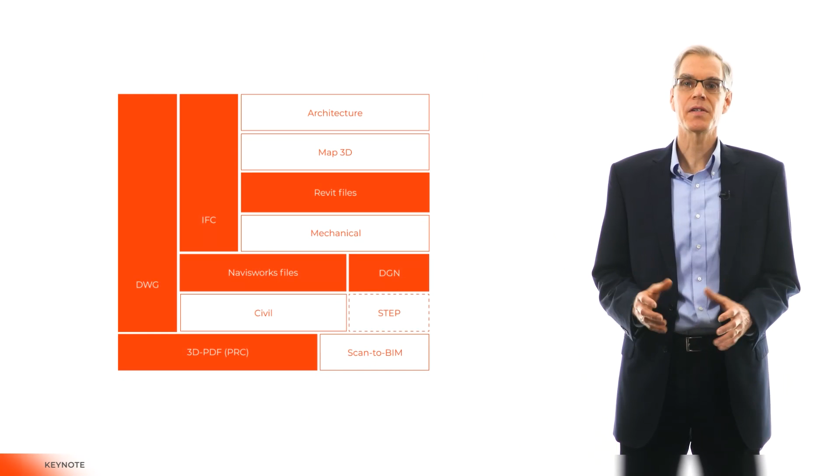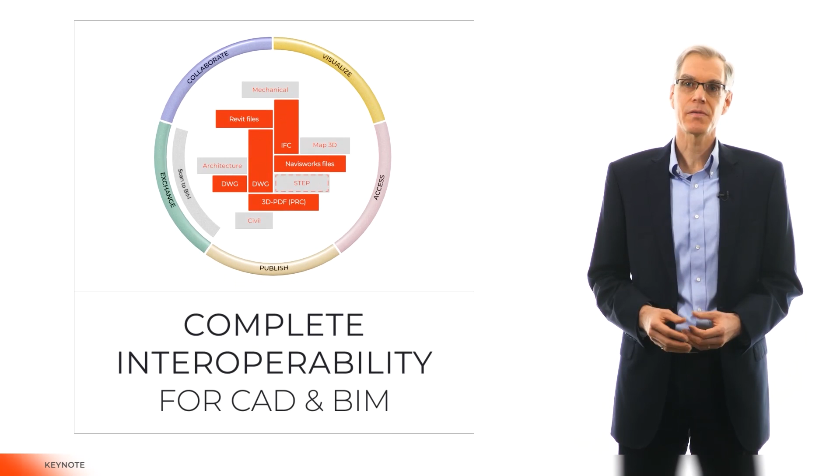During the past 5 years, the ODA platform has been quietly undergoing a transformation. We've taken a set of individual format SDKs and evolved them into a unified platform that can solve an increasingly sophisticated set of interoperability problems. Our offering to the industry in 2021 is complete interoperability for CAD and BIM, and that's the theme for our conference this year. Our agenda today includes technical presentations from the ODA development team, real-world success stories from ODA members, special guests from Google and Building Smart International, and new this year will be a couple of panel discussions from industry experts that I think you'll find quite interesting.

At the start of the pandemic last year, we made a smooth transition to work from home, and most of us are still in that mode. I hope that we'll be able to safely reopen our offices by the end of this year, but in the meantime, we've maintained an aggressive development schedule, and our team has performed well during a difficult year. Membership growth in 2020 was flat, which was not unexpected, but we finished the year strong, and 2021 through third quarter has been our strongest year on record for membership growth. The pandemic isn't over yet, but we're hiring aggressively, taking on new projects, and we see a bright future ahead for ODA.

Narrowing in on BIM, industry experts expect the BIM software market to grow by 13% annually through 2024. Global infrastructure spending over the next 20 years is expected to be more than $90 trillion. Commodity prices are expected to rise more than 10% this year, and labor costs are increasing. At the same time, labor productivity growth in construction has been increasing at a rate of only 1% per year over the past 20 years, compared to 3.6% for manufacturing. There's a huge opportunity for companies that can improve the efficiency of the construction industry through digitization.

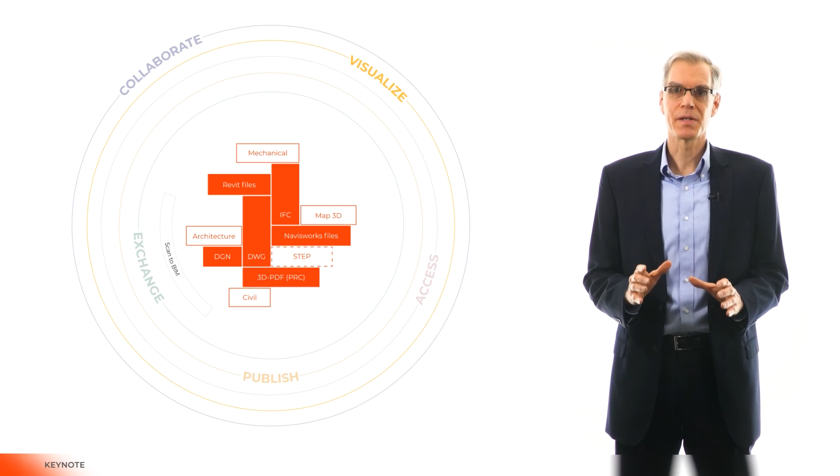Complete interoperability is a set of integrated technologies for working with CAD and BIM data. It's format SDKs on steroids. It includes common frameworks for visualization, publishing, and web collaboration, and we have our own solid modeler and facet modeler for working with complex 3D geometry. It's everything you need to build sophisticated CAD and BIM applications on any platform, including web.

A fundamental part of ODA's mission is a commitment to Open BIM. ODA is a strategic partner of Building Smart International, and our goals as an organization are fully aligned with BSI. We participate in a number of BSI working groups to help advance the creation of Open BIM standards. Our Open BIM technologies include a comprehensive IFC toolkit, as well as support for BIM data exchange through the mvdXML and IDS standards. On the collaboration side, we now support the OpenCDE standard in our cloud platform. OpenCDE is BSI's new standard for common data environments, which includes workflows for issue resolution and document exchange.

Finally, we have OpenIFC Viewer, our free viewer that integrates fast, professional-grade visualization with support for the latest IFC versions, along with clash detection, BCF issue resolution, and more. ODA offers the best and the most complete Open BIM solution on the market today, and we're committed to Open BIM for the long term.

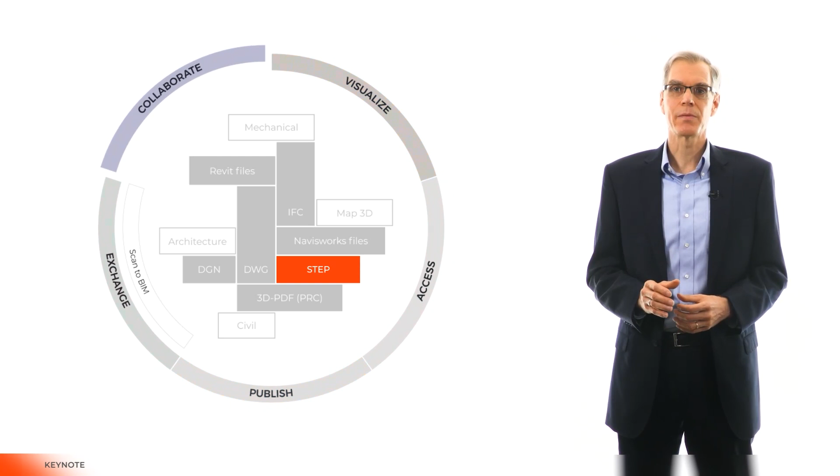ODA has been making great strides with BIM, but we're also seeing strong demand for advancements in mechanical CAD. In a recent member survey, more than 50% of our members requested a solution for STEP, the standard exchange format for 3D mechanical CAD. In response to this demand, we recently began work on a new SDK for STEP. Our goal is to deliver a best-in-class solution with full data access and creation support, integrated visualization and publishing. Complex 3D geometry will be supported by our own native solid modeler, so there won't be any dependencies on expensive third-party modelers. And since STEP is an open standard, our STEP SDK will be available to all ODA members at no additional cost.

ODA is in the process of joining PDES Inc., the organization that maintains and develops the STEP standard on behalf of the industry. STEP has been around since 1994. It's been a successful standard and one that's still growing and adapting to the changing needs of the industry.

STEP is now part of ODA's strategic mission, and we're looking forward to delivering our new STEP SDK by the end of 2022. Laser scanning technology has been advancing rapidly in recent years. Even the latest iPhone has LiDAR capabilities. But you can't say the same thing about our ability to process the point cloud data generated by all of these really cool laser scanners.

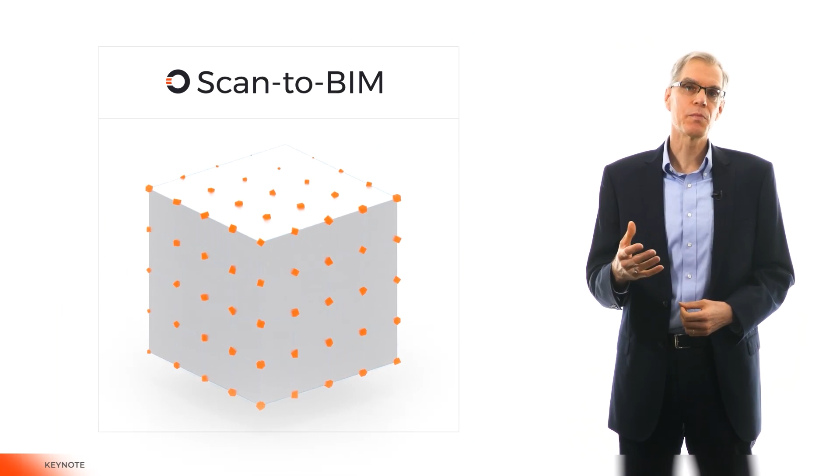It's not enough to import a point cloud and use it for reference in a design tool. We need to be able to generate BIM models automatically from point cloud data. To address this problem, ODA has created a new strategic interoperability group for Scan-to-BIM. We're working collectively with a group of ODA members to develop technology for converting point clouds to 3D BIM models in IFC and Revit formats.

With expertise in point cloud processing, complex 3D geometry, BREP modeling, and BIM technologies, ODA is well positioned to solve this critical industry problem. We have a group of special guests here today from major architectural design firms who will be giving us their insight into the challenges and requirements for Scan-to-BIM.

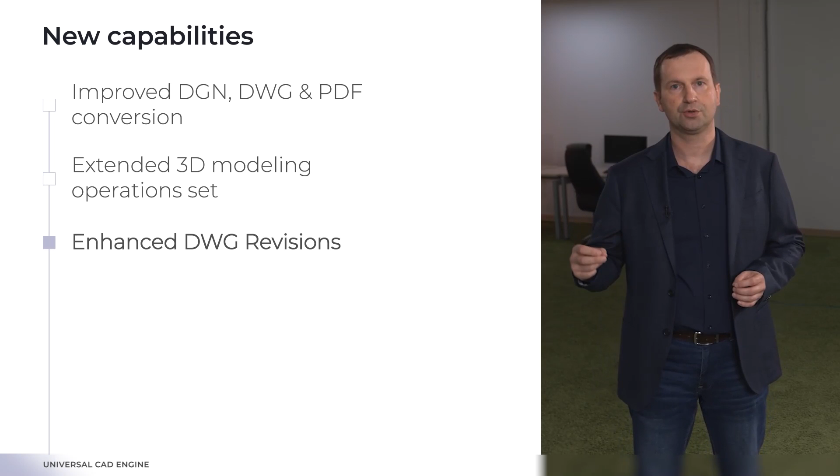We extended the set of 3D modeling operations natively supported in Drawings SDK without the need for any third-party libraries. These newly implemented features include Boolean operations on incomplete solids, support for tolerant topology, and complete sculpturing functionality. We enhanced ODA's unique DWG revisions technology used for storing drawings history in an optimal way.

We added support for DGN metadata that provides access to custom data in DGN files, for example, BIM data, and we continue working on improvements to various entities. Now, we'll see an example of how a member is using ODA Drawings SDK in a real-world application.

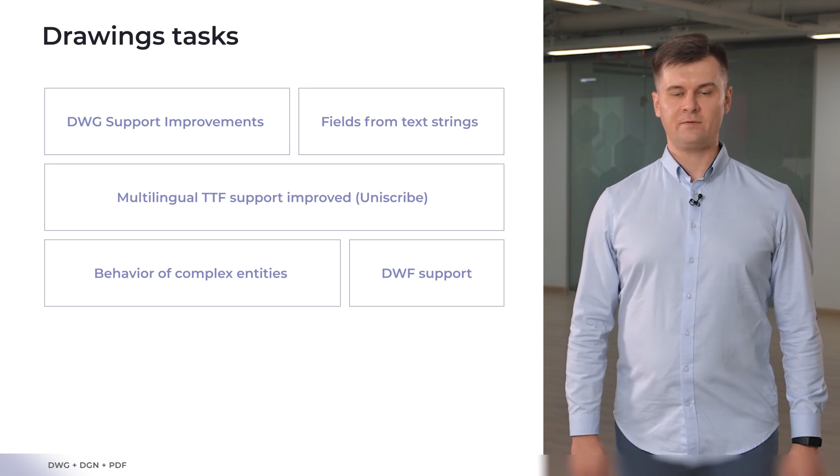Let us move on with our DWG, DGN and PDF triad and have a deeper look at the DWG area. DWG support has a long history, proven stability and well-known features. But we do not stop work and go on providing enhancements and new features on a regular basis. DWG support improvements were done in the following areas: fields creation and improvements for entities such as mLeader, hatches, associative arrays, polygon, and table entities.

Objects creation from content strings was implemented for text, mText, dimension, and table entities. Expressions, object parameters, database variables were supported, including nested fields. On the screen you can see an illustration, a set of strings that were used as input and a set of objects that were created using those strings.

Fields trees were created as a result of using codes as arguments for setting strings methods, such as setString, setContent, and setDimensionString. Fields trees are marked on the screen. You can see it. This approach is implemented in the Model Doc project to create title texts.

Improved visualization of TrueType fonts using the Uniscribe Windows API allows us to more accurately draw international characters that use diacritics, umlauts, and similar elements. On the picture you can see Arabic, Western, Hebrew, and Thai fonts. The differences are marked with colors: orange, old version, green, new version.

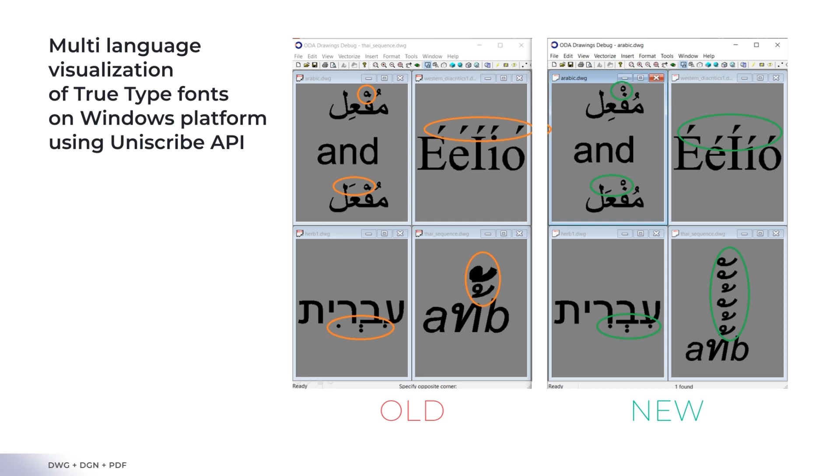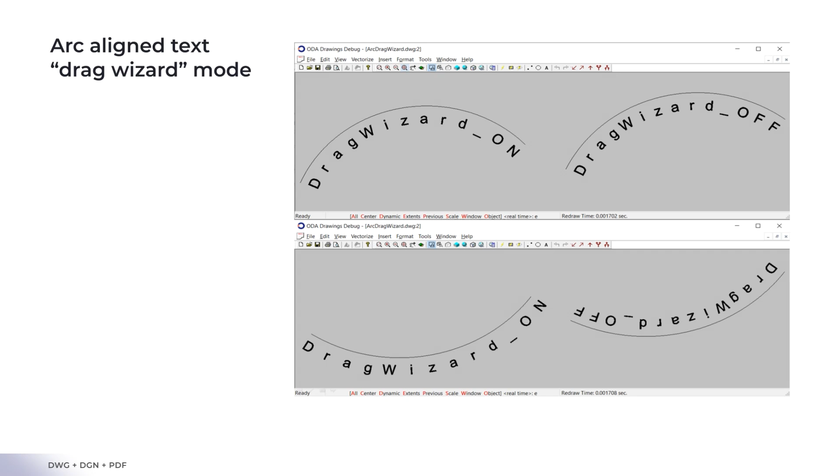Complex entities may have sophisticated behavior. When an application user drags a point, that doesn't mean that only these point coordinates were changed; most likely some other properties should be changed and recalculated accordingly. As an example, we can have a look at the drag wizard that controls the directions of the aligned text. As you see, the direction of the text stays the same despite all the changes of the arc.

The DWF database is used for DWF underlays vectorization, for DWF imports and exports to DWF. This year we have two improvements. DWF 2D geometry markup support was implemented and DWF 3D support was improved.

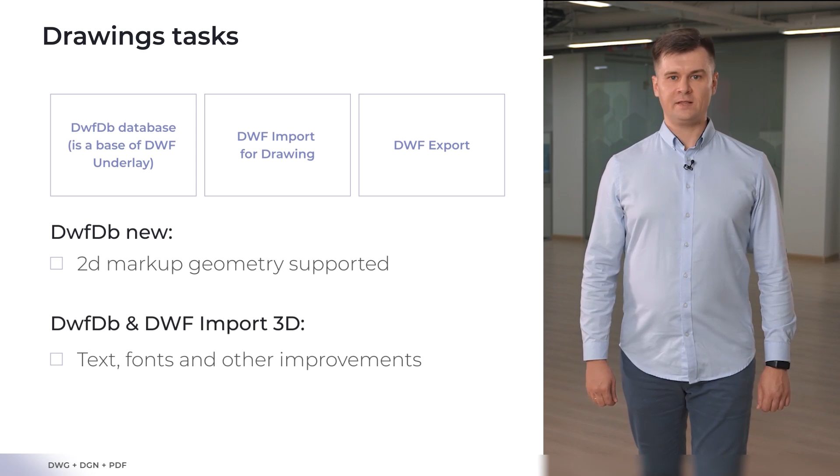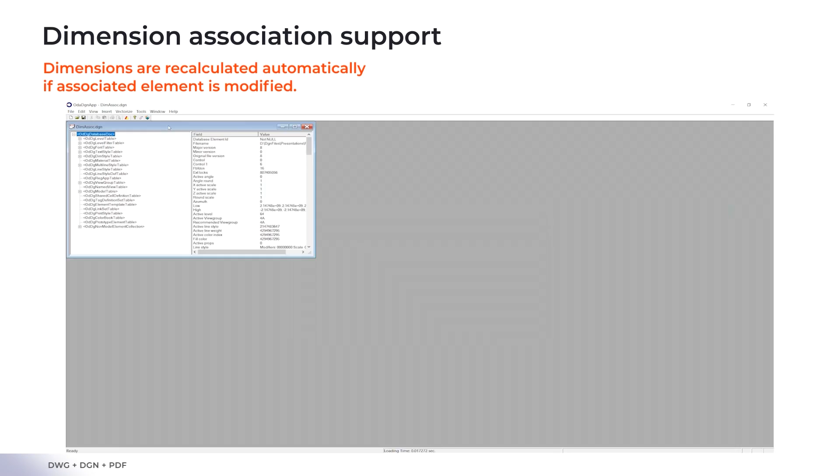DGN support is also a mature ODA capability. This year we introduced three major advancements: support for associative dimensions and entities, full support for DGN metadata, and partial loading support. This demo illustrates automatic recalculation for associative dimensions and multi-line points associated with other elements.

Metadata is an important part of the BIM approach. It is non-geometric data associated with the DGN element. It can contain information about the physical parameters, costs, relations between entities.

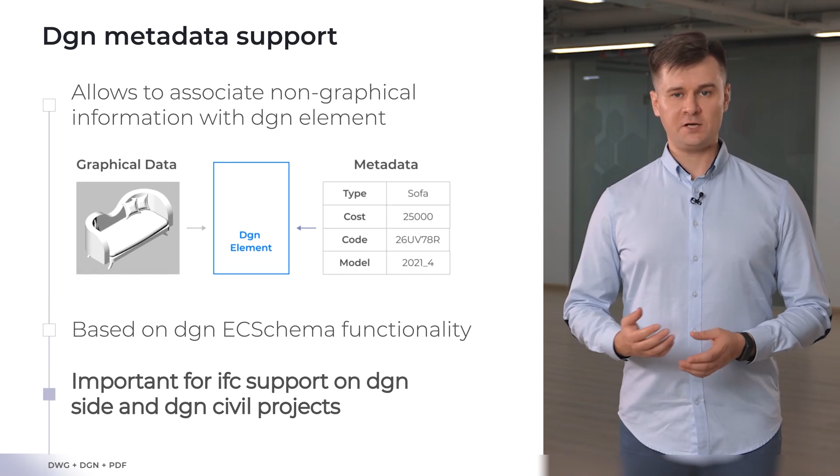Some operations with DGN files do not require access to all elements. For such cases, partial loading was implemented. Partial loading helps to save in memory only the position in the file and read the data from this position when we need access to this particular element.

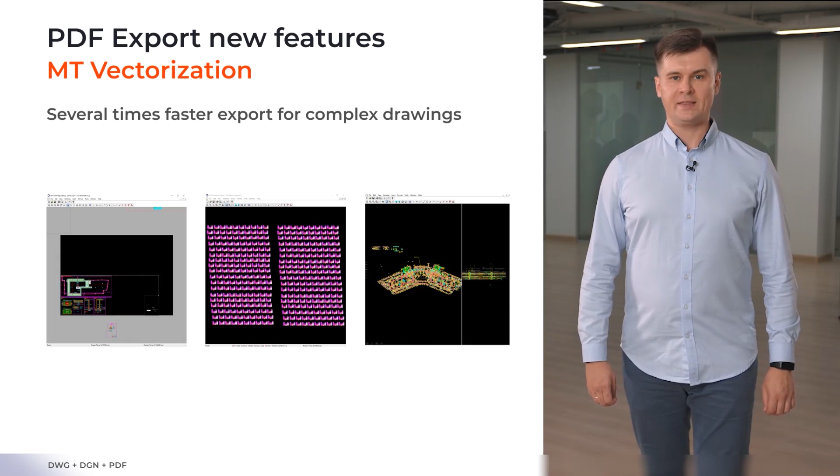Complex DWG models may contain blocks, but there are similar block entities in PDF files. If we convert DWG blocks to PDF blocks, we get a set of advantages. They are quicker speed of export, the resulting PDF file size will be smaller, and additionally, processing of such files by PDF readers, for instance Adobe PDF readers, will be done quicker.

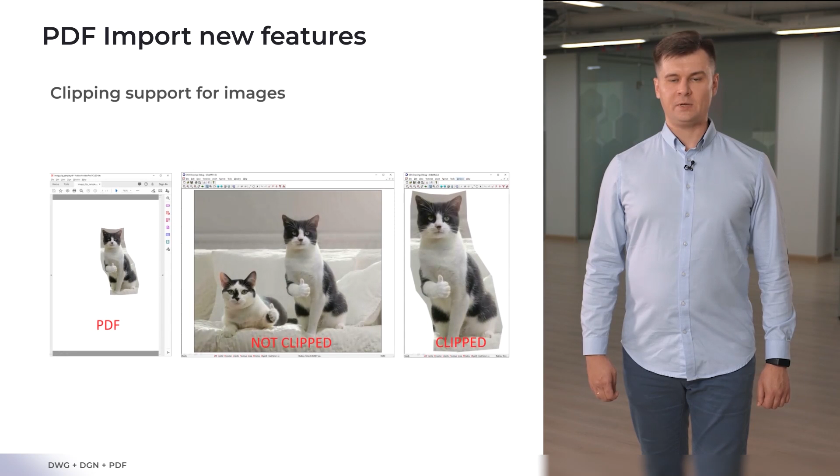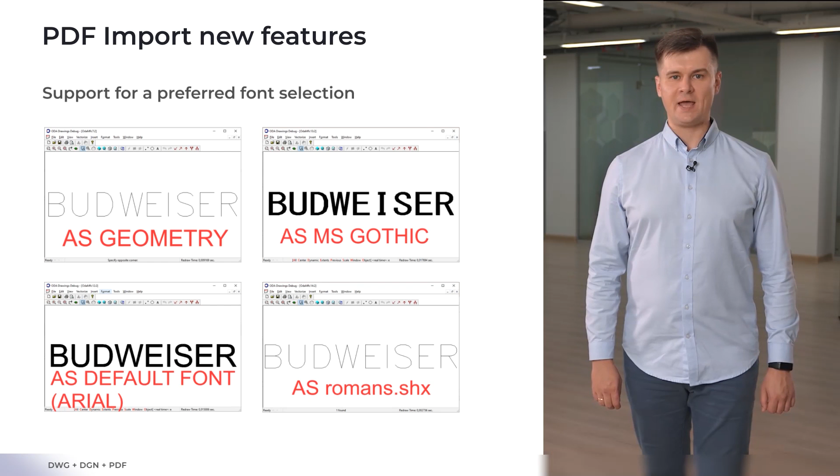PDF import area included three main directions for improvements: clipping support, text import, and widgets import. We added image clipping support to make the imported files as close to the original PDF as possible. For text import, we have two main enhancements: preferred font support and embedded font support. Preferred font support allows us to import text as text with any font we wish. Embedded font support means the following: if the embedded font is saved in the PDF document and fits the TTF standard, it can be also saved and then used during the visualization of the imported DWG file.

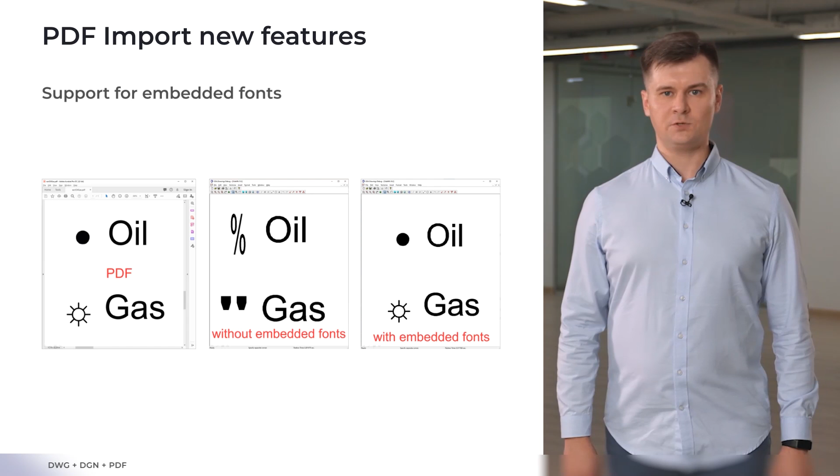Complex PDF documents may contain widgets. Widgets import is designed to make the resulting document as close to the original PDF as possible. Widgets in this case are imported as a set of images, geometry, and text. In addition, we also implemented importing of hyperlinks from PDF and many other enhancements.

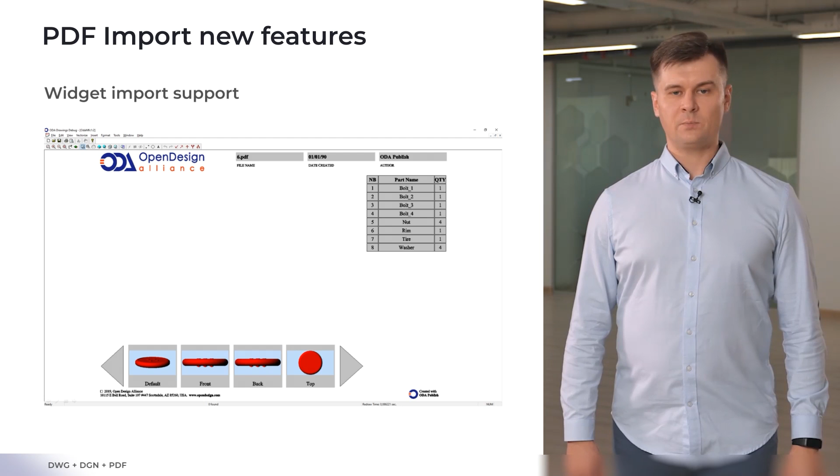Publish SDK consists of four main parts: 2D PDF export, 3D PDF export, PRC API, and Publish API. 2D PDF export is quite well known. 3D PDF export requires a PRC model to be embedded in the document. PRC API actually can create or modify or work with PRC models. And Publish API allows you to create almost any type of PDF document.

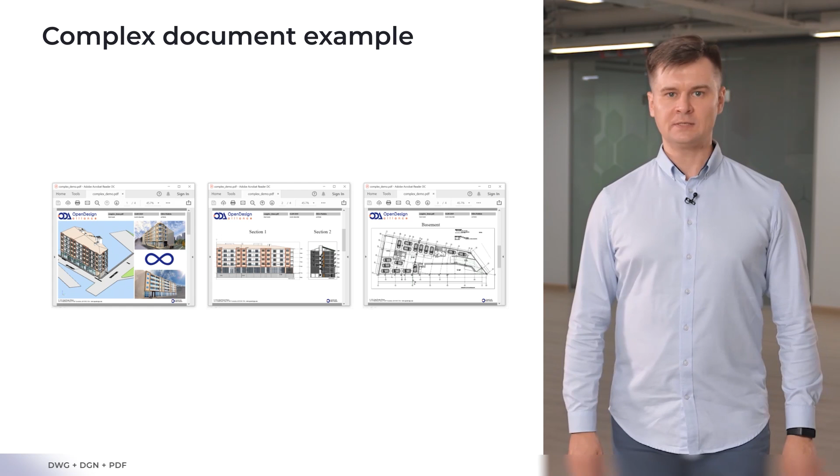This document consists of several pages and contains all basic elements such as 3D view and 2D view combined on one page, custom UI controls, and 2D projections and section. One more example of an interactive document created using Publish API. On the bottom you can see the buttons to switch between the predefined views. On the side, you can see the part lists to select parts of the model, and you see that the selected parts are highlighted.

SWIG wrappers are already known to many of our members. We provide wrappers for C#, Java, and Python. C# wrappers have the widest coverage. This year, we provided wrappers for IFC SDK.

Microcad Software is a company specialised in the development of interior design software. Our main products are AutoKitchen for kitchen, bathroom and bedroom design, and AutoDeco for commercial kitchens. Our programs have been based on an AutoCAD OEM for the last 23 years. In recent years, we felt that the improvement for our software was limited by the kernel.

If we analyse the advantages and disadvantages of using AutoCAD OEM, according to our experience, the main pros would be the following. Using an OEM AutoCAD engine instantly transmits more trust and is recognised worldwide by designers. AutoCAD is a powerful and reliable product, and it includes an ACIS modeler as the geometric modelling kernel, which is very powerful and reliable. Among the main disadvantages, we can highlight the following.

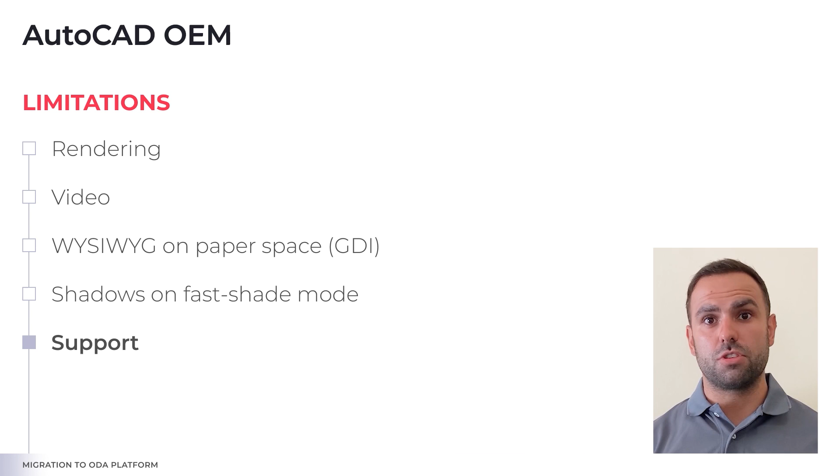We decided to use ODA to have more flexibility by developing our tools at a deeper level and by using third-party solutions adapted to our needs to enhance its functionality, such as a powerful rendering engine with photorealistic walkthrough capabilities. The change to ODA gave us more flexibility in the development of AutoKitchen. The high quality of the technical support and speedy fixes also allow us to improve and develop AutoKitchen thanks to monthly version updates fixing reported bugs and issues.

In addition, the updates take into account the developer's requests, in contrast with the AutoCAD improvements that are focused on what the rest of the AutoCAD community needs. Finally, the payment of a fixed fee facilitates business management, especially when the fee is affordable and reasonable. The main drawbacks that we have encountered have been the following.

Development is slower because there are tools that are available in AutoCAD, but that have to be developed by us in order to put them into ODA. The lack of rendering was an inconvenience, but at the same time, it was an opportunity for us to use a different rendering engine that was best suited to our needs. The solid modeler is much more basic than ACIS in AutoCAD.

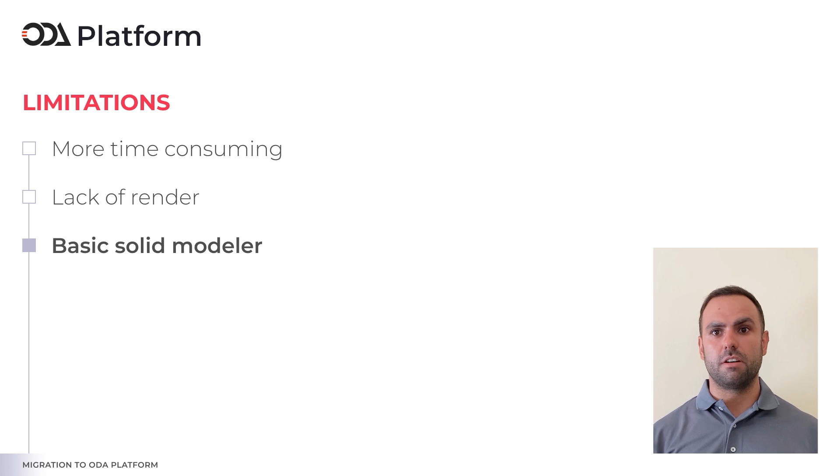We developed the application using the ODA MFC application as an example, as a basis, but it took more than a year to get AutoKitchen ODA to have the same look and feel as on AutoCAD. In the development, we found that we could use the DLLs with minor changes. Most of the blocks used in our libraries were valid, but some solids had to be redrawn as they displayed well in AutoCAD, but not in ODA.

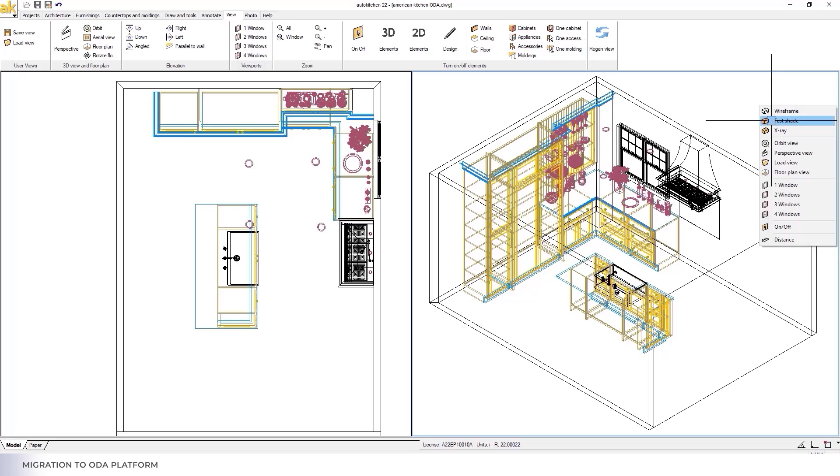We spent most of the time on the user interface to make the program look like the AutoCAD-based program. The new ODA-based version of AutoKitchen works the same way as the old AutoCAD-based one. Here in AutoKitchen, we have a nearly finished kitchen to demonstrate some of the features and processes in the software.

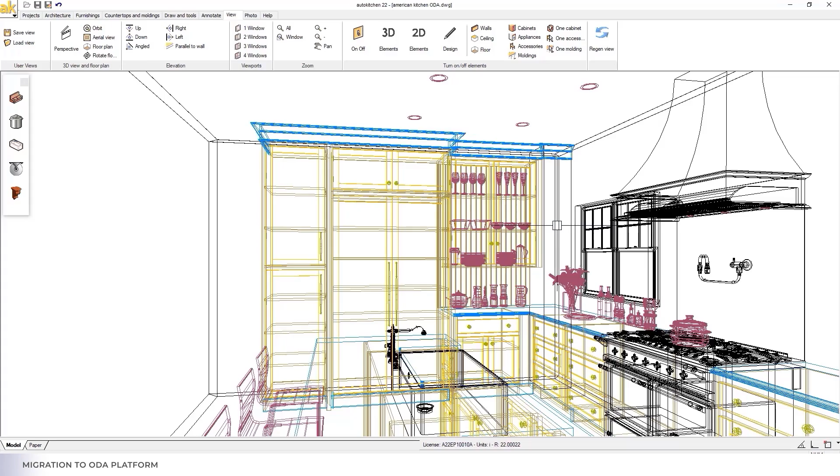Before we render, we need to show the walls and ceiling that we previously hid, and then place the camera where we wish. We change to fast shade and adjust the view of what we want to make a render of. Our rendering has 4 quality settings to choose from, and here we will select the fast setting, which will generate a render usually under a minute on most designs.

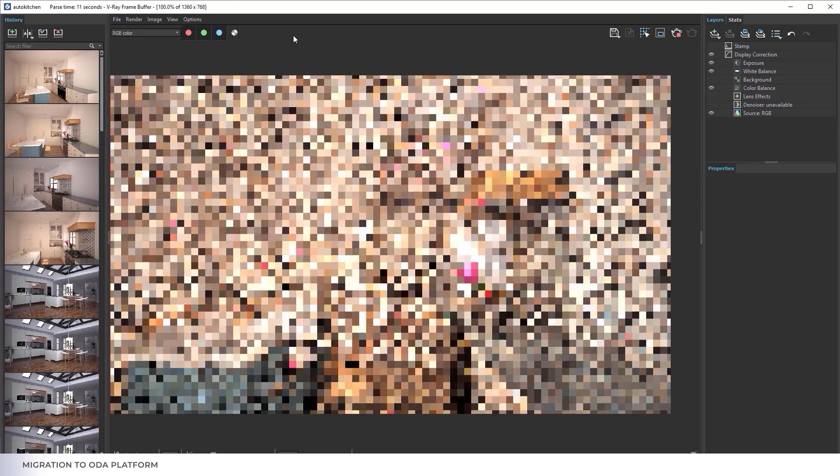When we click render, the program exports all of the scene information from lights, geometry, materials and so on. The render is then generated and takes you to a render menu where you can make adjustments to the image with a range of modifiers like exposure, contrast and so on.

In conclusion, we are happy to have made the change. Now we have a better program at an affordable fixed fee. We would like to highlight the quality and speed of the support service compared to our previous experience. After 2 years of development, we've created a new version of the program with the same interface as the version based on AutoCAD, so the customers have not noticed the change of the engine.

The program has improved functionality, and the render engine we link with is easy to use and generates photorealistic images, 360 panoramas and videos with better quality that put us ahead of our competitors.

Hello, I'm Ilya from WSCAD. Recently, we released our new electrical CAD system that uses ODA components in its core. It was quite a long and challenging way. So the question is, why? Why replace an already working solution with something different? Is it really worth it? Well, let's figure that out.

Speaking of electrical engineering, we should keep in mind that it doesn't exist in a vacuum. As input, we usually have a plan of a building in DWG format. The main task is to extend the plan with electrical appliances from our data model. After that, we need to share the results, saving the changed DWG back and generating the whole project documentation in PDF format.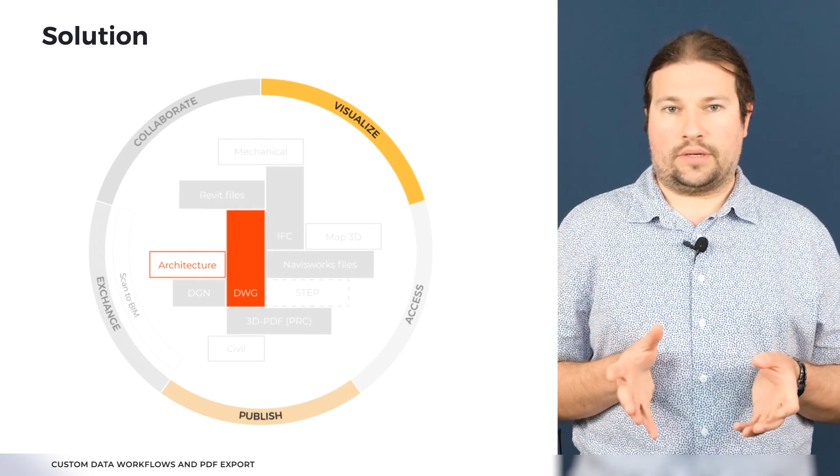And yes, we can. The general idea is to use the ODA tech stack for the whole workflow I described earlier. ODA Drawings is used to read incoming DWG files, not losing details. Also, we have a performance boost here, as the step of converting DWG to our internal data model is eliminated. You can simply open the DWG file and here it is.

Showing a drawing on the screen is performed via ODA Visualize. And it's not only accurate in displaying content, as it's supposed to be, but it's also fast, thanks to GPU hardware acceleration. Third, saving DWGs back becomes a very simple operation provided by Drawings technology. It's fast, reliable, and what is more important, it preserves the structure of the original document we got as an input. And then, export to PDF is performed via ODA Publish.

Despite its quite simple 2D plans, there are a lot of aspects to think about. So, let's figure out why we need PDF export. After all, we develop sophisticated software, so why not use it as a viewer also? There are several reasons for that. Obviously, our software costs money. Also, it's pretty function-rich and therefore, well, more or less heavyweight. And also, it doesn't exist for all of the platforms yet.

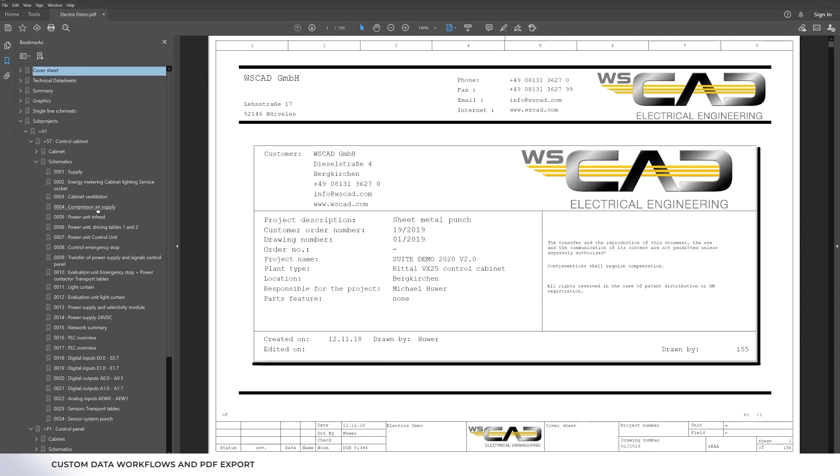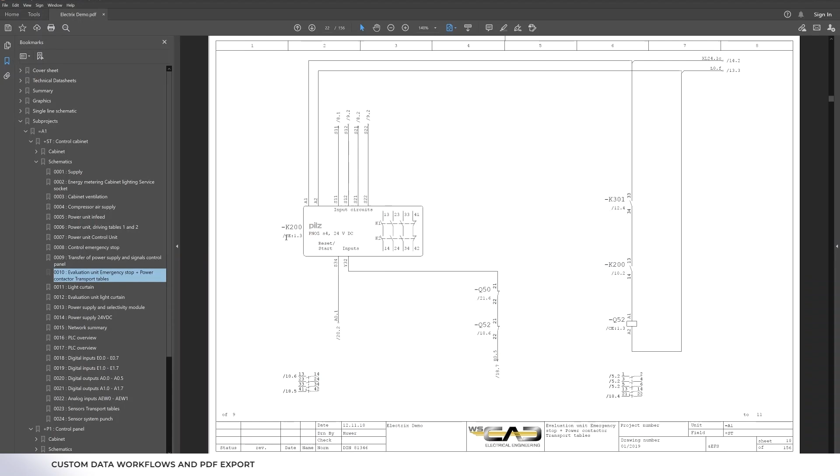Second, we have a lot of electrical symbols on every page. Using annotations in the PDF file, we can show users additional information on these symbols, like they're working with our CAD system. Then, all the pages in the document are not independent. A symbol from one page might be connected to something on a different page. Therefore, we provide cross-page references. You can click on a link on one page and instantly move to a connected page. So interactivity is really useful here.

And last but not least, all the pages are generated in CAD quality according to the what you see is what you get principle. So, as a result, our customers receive a lightweight, multi-platform version of our CAD just as a PDF file.

So, switching to the ODA solution allowed us to achieve the following goals. Well, significant codebase simplification of our solution, of course. Performance improvement of DWG file opening and rendering and other interactive operations. A true what you see is what you get approach. Now everything a user sees on the screen looks the same in DWG or PDF.

But most important, ODA allows us to speak the same language as the rest of the world. We can freely understand complex DWG files containing not only simple graphics primitives, but even architectural elements. And we can generate such complex files by ourselves too. And we can provide first-class drawings in PDF files to our customers, who maybe don't even have any CAD system on site. Thank you for watching.

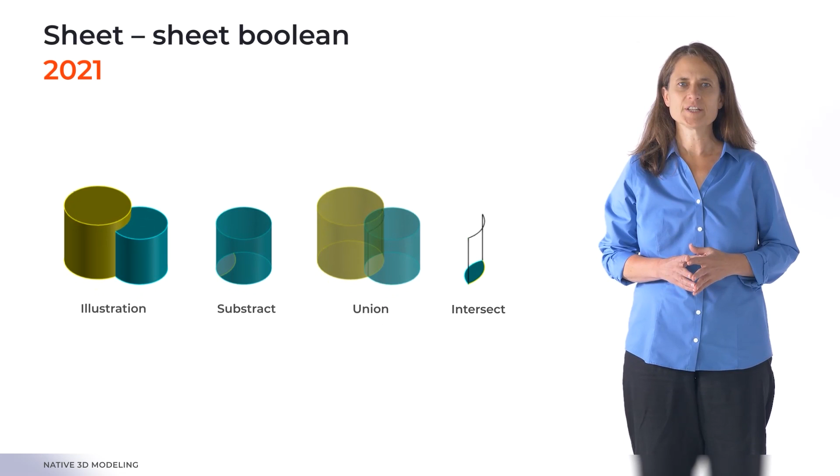ODA Solid Modeler is a part of our Kernel SDK. Several ODA products, including BimRv, Civil, IFC, and of course Drawings, work with it. Solid Modeler works with BREP-based 3D objects and implements a set of modeling operations. This year, we implemented the following new features: sheet-sheet Boolean operations on incomplete solids, and generation of a network surface from a set of cross curves. This should be finished by the end of the year.

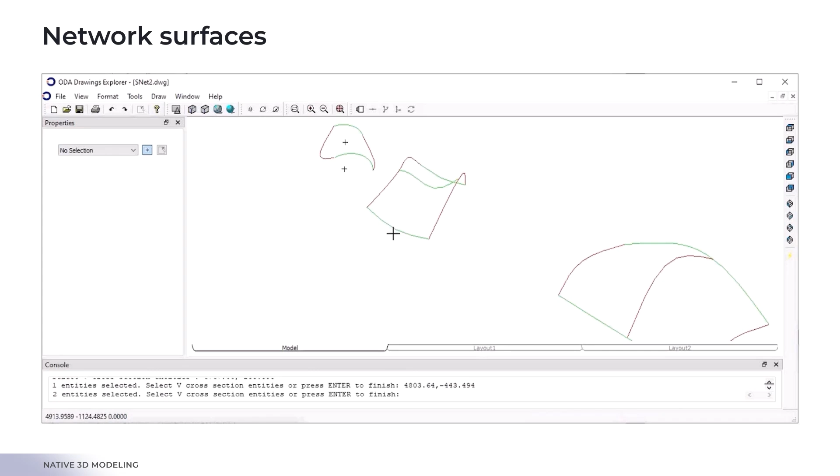A network surface is a non-planar surface created in the space between several 2D or 3D curves in the direction of the U and V axes. The green and red lines are 3D curves in the U and V directions. Let's watch a short video demonstrating network surface creation.

There is a group of 3D curves. For simplification, they are marked with different colors, and creation of the network surface is pretty simple. Select all curves in one direction, then in a second direction.

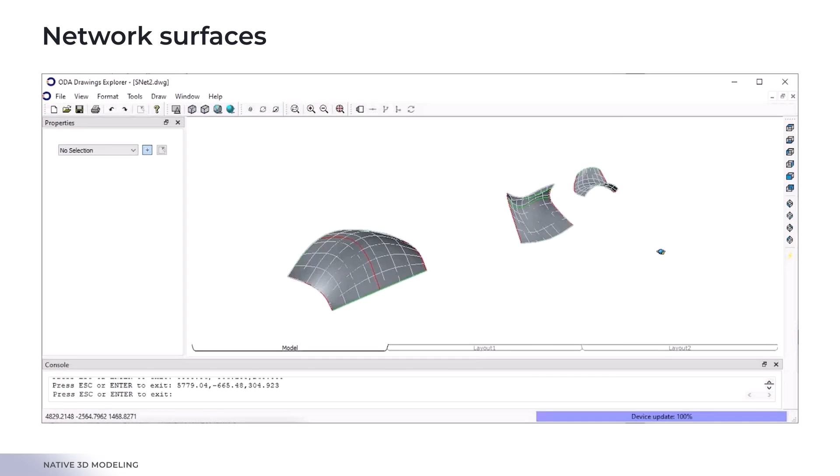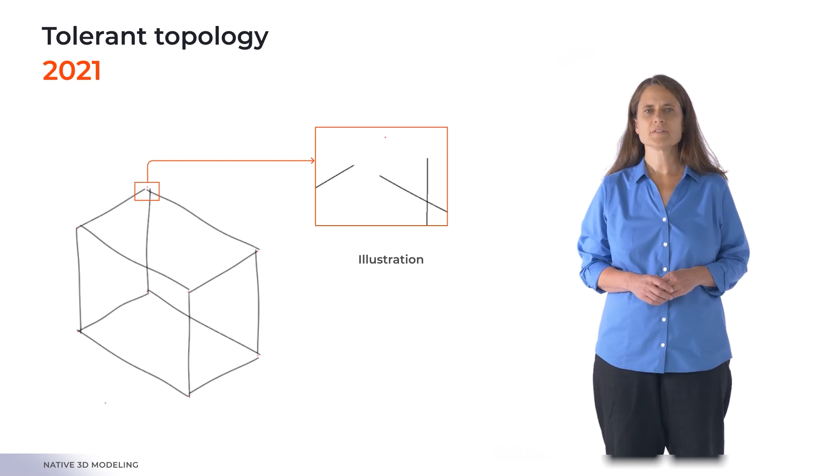Tolerant topology support is a feature that is worth special attention. Last year, Boolean operations for solid entities were open to ODA members in investigation mode. Members who use Boolean operations provided feedback, and we found that a lot of models have tolerant topology. Support of tolerant topology affects Boolean operations in Drawings SDK if input bodies were created outside of ODA SDKs.

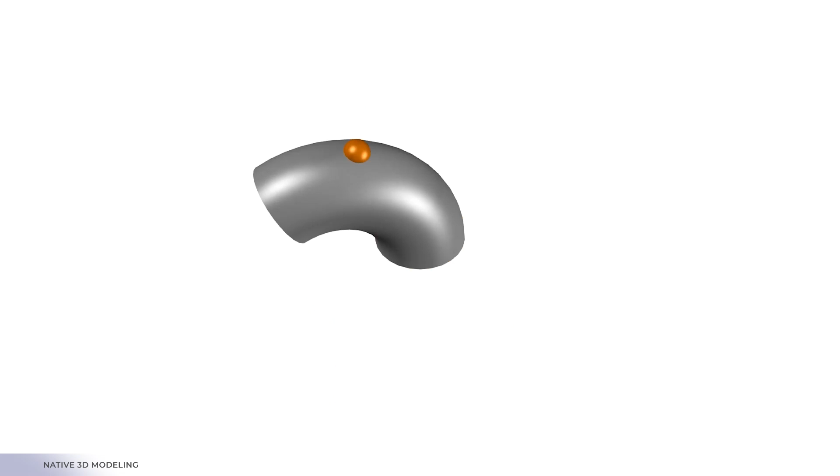We implemented a new sculpt operation using the ODA Solid Modeler. The Sculpt operation creates a watertight solid from a group of surfaces, regions, solids, or meshes. Here is a demo of how this operation can be used. We create a circle and do a revolve operation to make a pipe bend. Then we extrude another circle to get cylinder pipes.

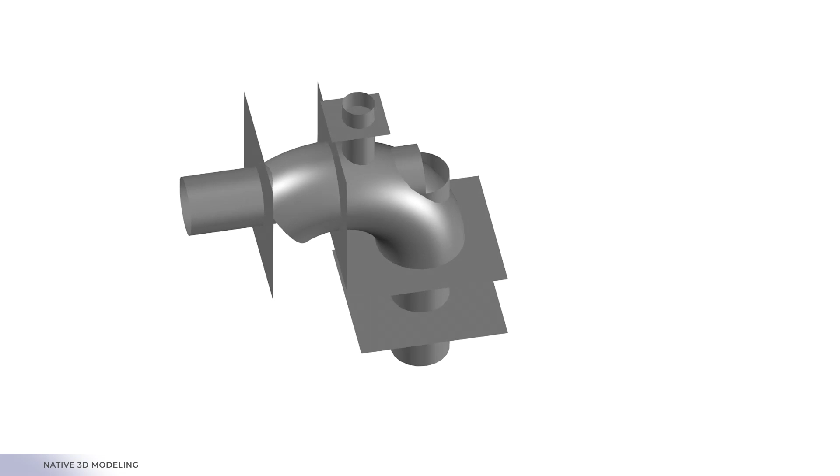We add a few planes to bound the created pipes. Note that we don't need to precisely set plane bounds or cylinder heights. Then we perform a sculpt operation on the created surfaces and get a single solid pipe. All redundant parts are automatically removed.

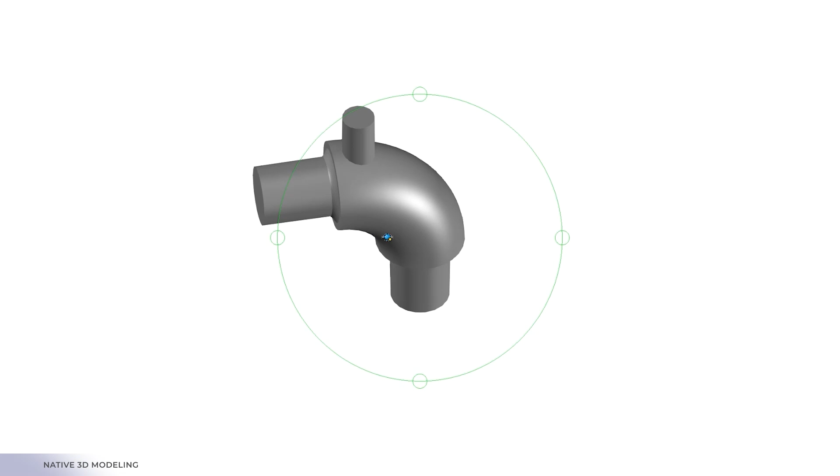Now we create an elliptical arc, revolve it, and perform another sculpt operation. We effectively made a fillet operation using sculpt. All redundant parts are once again automatically removed.

In ODA, there are features that are based on top of other features and complex algorithms. Model documentation is an example of such a feature. This year, we added and fixed new commands. All section modes are now supported. For section and detail view, support of materials and colors was implemented. Currently, we are working on section and detail view optimization and hidden line removal algorithm optimization and fixes.

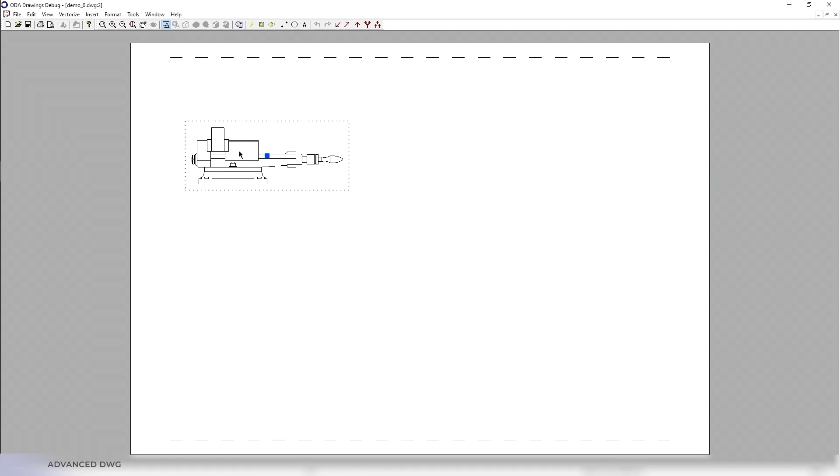Now let us illustrate view-based view section and other commands. View-based command: first, we create a base view. We can exclude a part of the model, and as you see, the base view is updated correspondingly. Next, we create orthogonal and projected isometric views. Next, we create a section view, AA, switch to the model and modify it. As you see, the views changed.

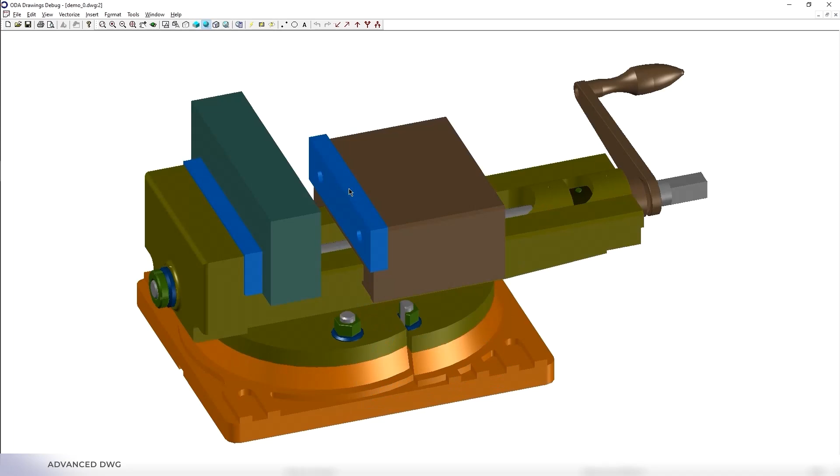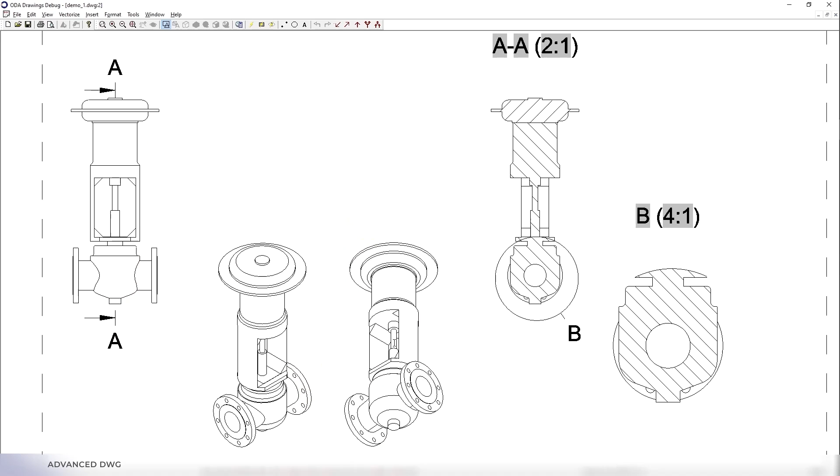Next, we'll illustrate how to change the appearance of the views. Currently, we have a base, a section, and a detail view. Let's create a projection view. Next, we change the parameters and create one more projection view. As you see, two projection views look different. We can also change the text position for section and detail view using commands.

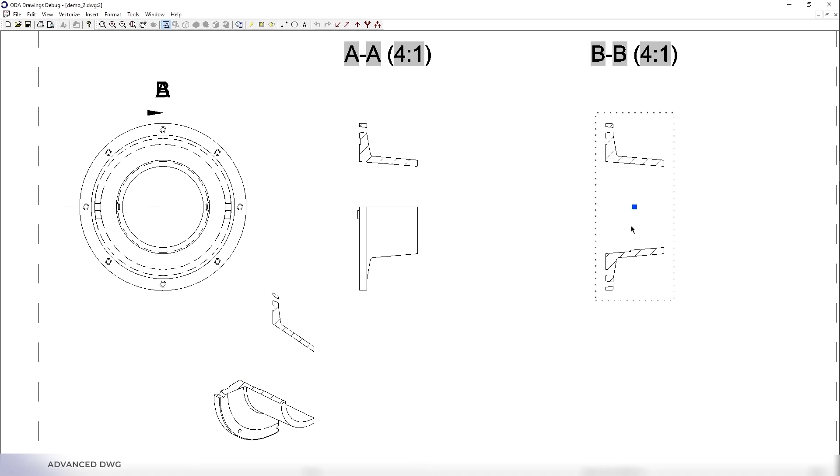Now let us have a look at a sectioning example. Let us create two section views, AA and BB, and a projected view for the AA section. Now let's edit the view, select the BB section and modify the section in depth. Then perform the same modification for AA. As you see, the corresponding projection view changed as well.

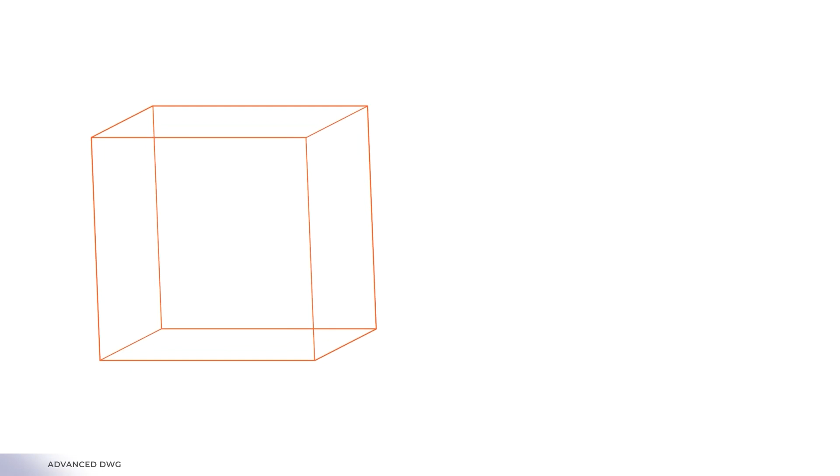Another advanced feature of DWG support is revision control. Branch merge is an essential part when working with revision control. The more agile this mechanism is, the more predictable and expected result we can get. Thus, this year, the key focus was on this part of revision control. In the older version, you couldn't get the list of conflicted objects before the merge. Additionally, the merge procedure influenced the whole project.

Now it's possible to get the list of conflicted objects before the merge, and the merge policy became more agile to apply changes to a particular object only. The new merge implementation provides an extended conflict resolution policy that helps to get a wider list of results during conflict resolution. Let us have an illustration of a conflict for an OdDbMText object and make a merge decision in runtime. We got two branches.

One changed the text color, the other the color and the text. We make a merge and get the following conflicts. Conflict 1, the first text, as color was changed in both branches. The first time, we select Prefer My Changes and combine the new font style and the new text color. For the second conflict, we select My Changes only and get 2021 text with no color changes.

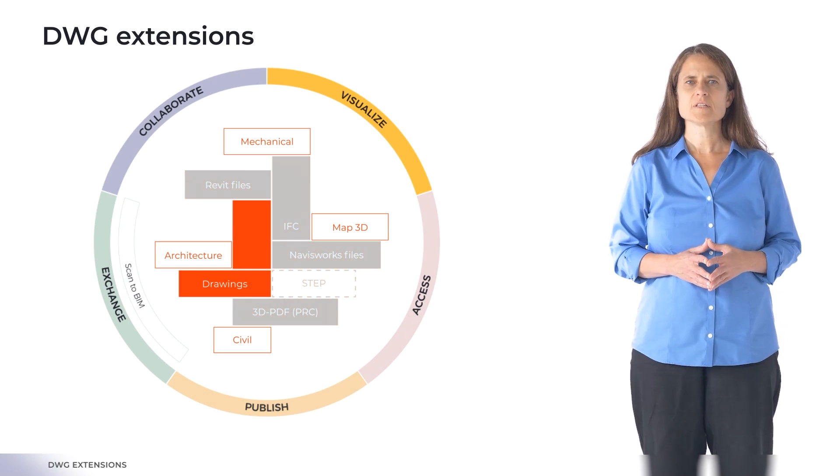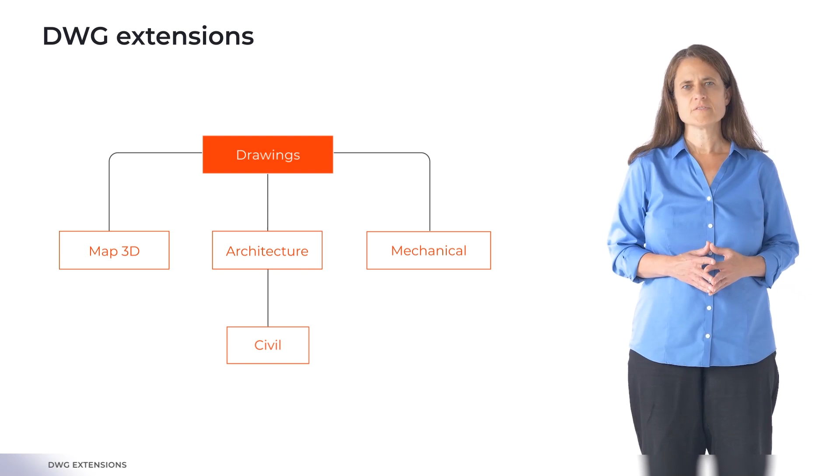DWG vertical extensions allow the advantages of DWG to be leveraged for additional areas, such as architecture, civil, map, and mechanical. The first three are used for the following tasks: architecture design and drafting, civil design, and working with GIS data. These areas are interconnected, while mechanical stands aside.

ODA Mechanical SDK is a toolkit for working with industrial standard drawing elements, such as balloons, part references, surface texture symbols, taper edge symbols, etc. It is developed as a SIG, or Special Interest Group project. In total, we support 27 entities in 7 standards. And we support objects from versions 2013 to 2021.

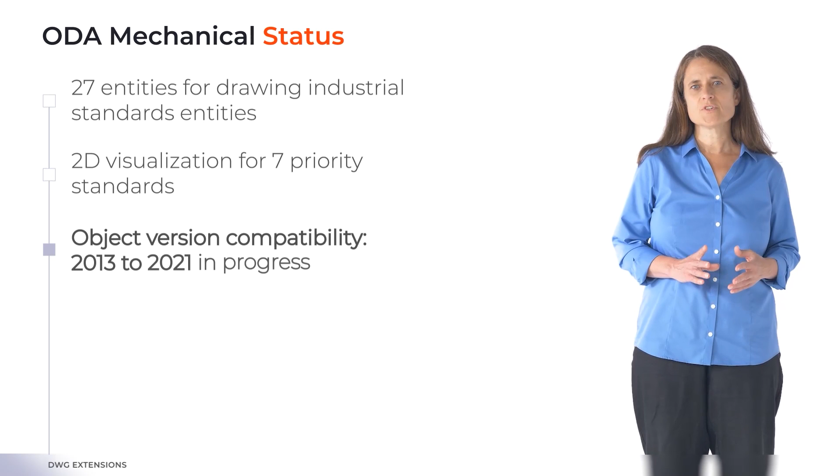This year, we added support for a new version of the mechanical DWG format. The new version contains new symbol standards for welding symbols. This includes new weld surfaces and new types of visualization. Also, new internal versions of classes are used to convert mechanical objects to older versions.

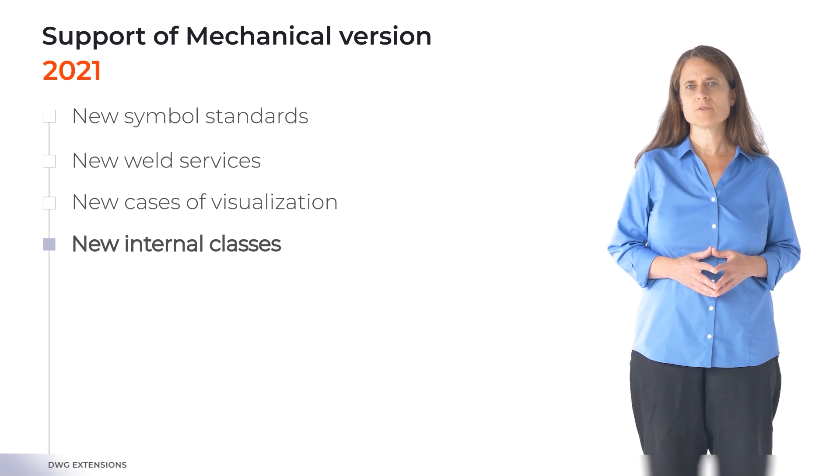We also modified the class hierarchy, excluding OdDbDatabaseMechanical. Now it is necessary to use special functions from the ODA mechanical namespace to convert a database to mechanical and for switching between modes. We have made a number of improvements: new methods for the Bill of Materials Manager, improvements to existing methods, and visualization of Bill of Materials related objects. Public interfaces have been extended with many new methods and now have more options for interfacing with mechanical objects.

My name is Robert Graebert. I'm the CTO of Graebert GmbH, a founding member of the Open Design Alliance. Graebert develops DWG-based CAD products under the ARES brand and has the second largest DWG CAD user base. We are uniquely positioned in the market with our focus on providing our CAD solutions on desktop, mobile, and cloud, with a consistent set of APIs for our development partners.

Our partners are segment leaders, and ARES is, for example, foundational to DraftSight by Dassault Systèmes, Onshape Drawings by PTC, and CorelCAD by Corel. In addition, we partner with vendors all over the world to deliver vertical solutions based on ARES. DWG is core to our offerings, and we leverage the Open Design Alliance toolkits for all our products. We also participate in all special interest groups that extend DWG support to specialized domains: Civil 3D, Map 3D, and Mechanical. We decided to participate in each group as the additional toolkits allow us to interoperate with other solutions in the market in each vertical.

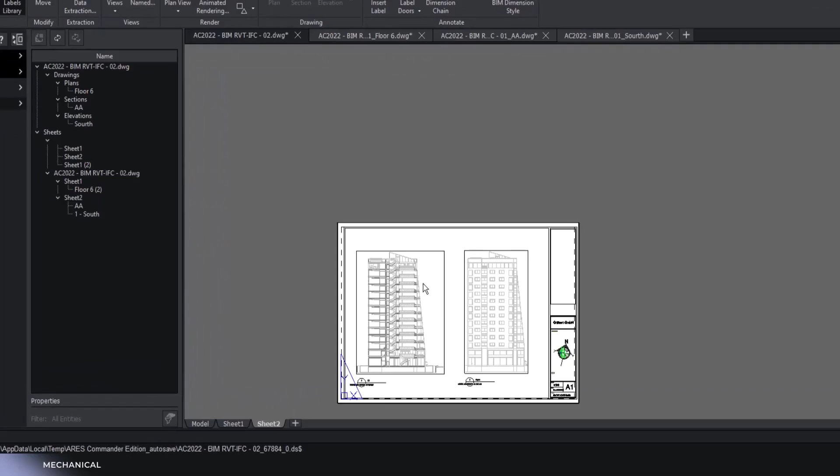In addition to DWG, we also participate in the BIM-RV Special Interest Group for the BIM features in our products. For BIM, we're focused on rethinking drawing production in a BIM world. We consume 2D and 3D geometry from IFC and Revit models, and then leverage BIM properties and the full breadth of our CAD features to provide tools for creating automated and associative drawings for your models. Today, I will focus on a different challenge we solve with the Open Design Alliance toolkit: maintaining legacy drawings in the product design market.

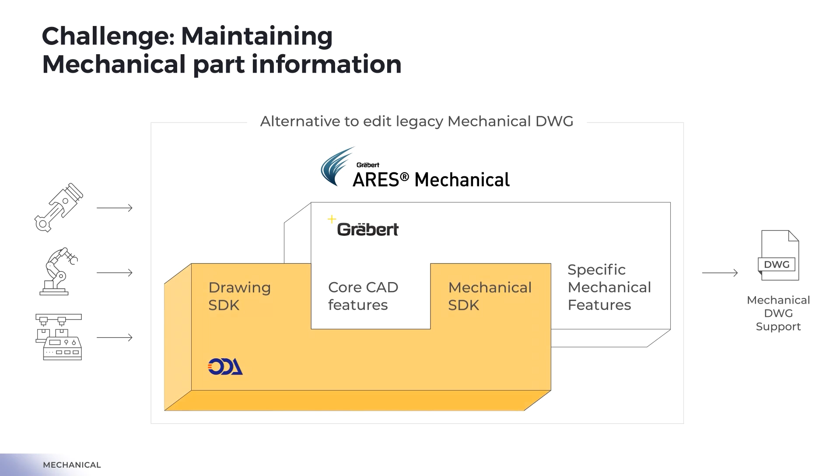New product design has migrated away from DWG-based solutions, but drawings continue to be a key workflow in the industry. When we talk to customers, there's a huge need to maintain part information in drawings. In our estimation, there are billions of DWG part drawings that need to be updated for products that are still being manufactured or in active maintenance. This insight was the initiating idea for creating Ares Mechanical. Ares Mechanical extends the DWG editing capabilities of Ares with special features for the objects originally created with AutoCAD Mechanical. This includes part information, bill of materials, and standard-compliant parts and annotations. These objects are all interrelated and contain a lot of hidden complexity.

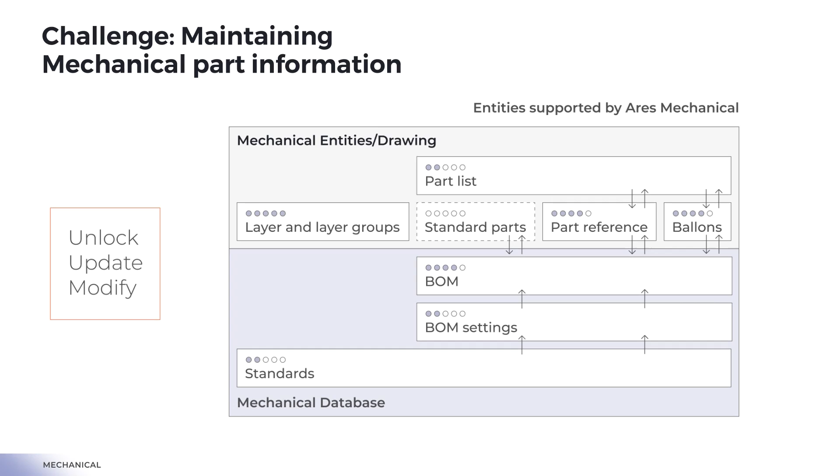So why is data compatibility with AutoCAD Mechanical so important? The part information in these drawings is not static. It is not sufficient to only visualize all balloons and bill of materials. It is also important to access and edit all properties of the referenced parts. Unfortunately, pure DWG support by the Drawings SDK is not enough. Applications built on top of the DWG format have persisted a lot of business logic in so-called custom objects. This means that without full support of the AutoCAD Mechanical objects, updating of part information is not possible. Developing AutoCAD Mechanical compatible libraries is the task of the Mechanical Special Interest Group. The team has been working on building out support for reading, rendering, editing, and writing of mechanical objects.

Throughout the development of Ares Mechanical, we work with all areas of the mechanical libraries, and I can give you an inside look on what works really well today and what are areas that are still in progress. Import, export, and rendering for the supported versions of AutoCAD Mechanical objects is working really well, but not all versions of AutoCAD Mechanical are supported at the moment. More support is coming. DXF export and import is currently missing, and for some modules, we're the first company using the APIs, and public APIs are still being extended as needed. I can say that we're working in close collaboration with the development team, and I want to thank everybody for their effort. One of the benefits of the Special Interest Group model is that all SIG members benefit from our testing and bug reporting and can leverage the libraries today.